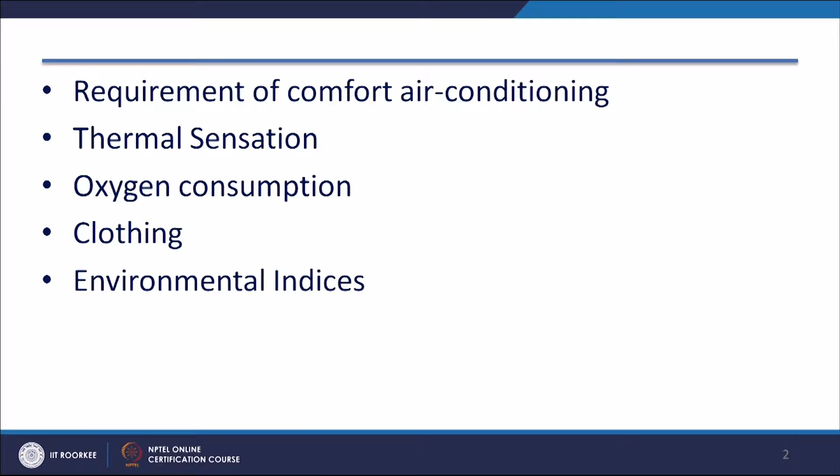Thermal comfort is required, as I've told you in previous lectures, to increase the working efficiency of an individual. If the efficiency of an individual is maintained, then the production in industries will increase. Even in offices, efficiency will increase if the offices are air conditioned.

The outside environment never keeps you in a state of thermal comfort. Either you have winter season or summer season, or sometimes temperature is low and humidity is very high in the rainy season. So if somebody wants to remain in thermal comfort, an artificially controlled environment has to be created.

In this environment, ideally the temperature has to be 25 degrees centigrade and relative humidity of the order of 50%. But outside in the world, it does not happen.

So you have some thermal sensations. You may feel hot, you may feel warm in the outside environment, you may feel cold, and you may feel chill. But as an engineer, we have to quantify these things.

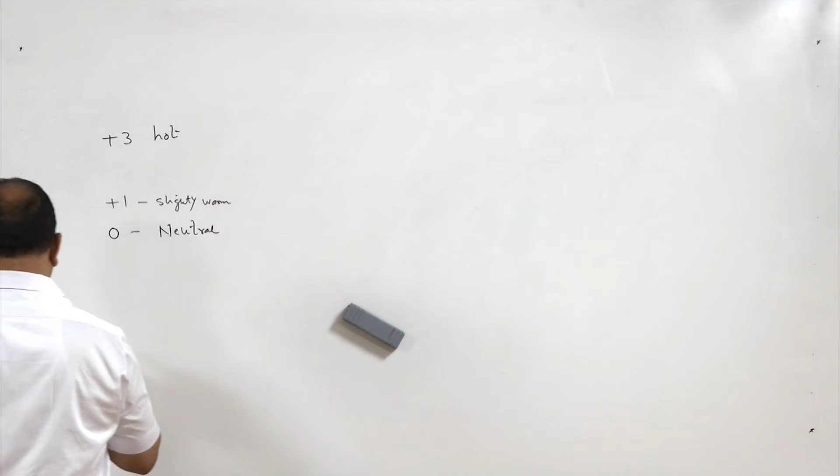Then +1 is slightly warm. +2 is warm.

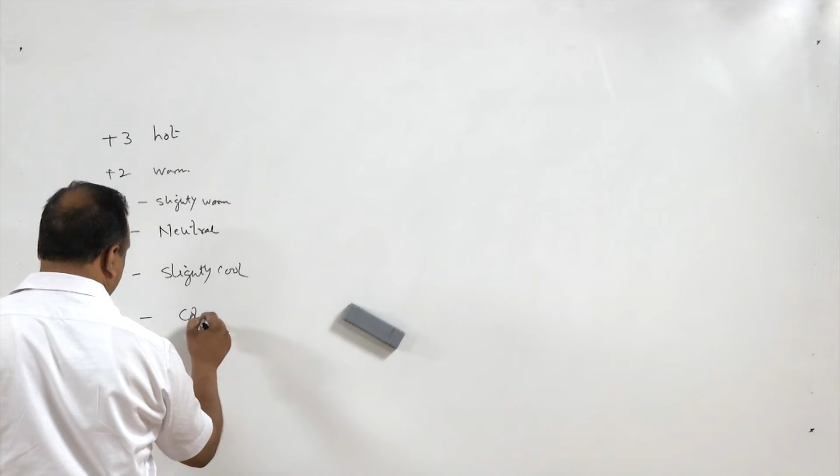Similarly, -1 is slightly cool. Then -2 is definitely cold, and -3 is severely cold or chill.

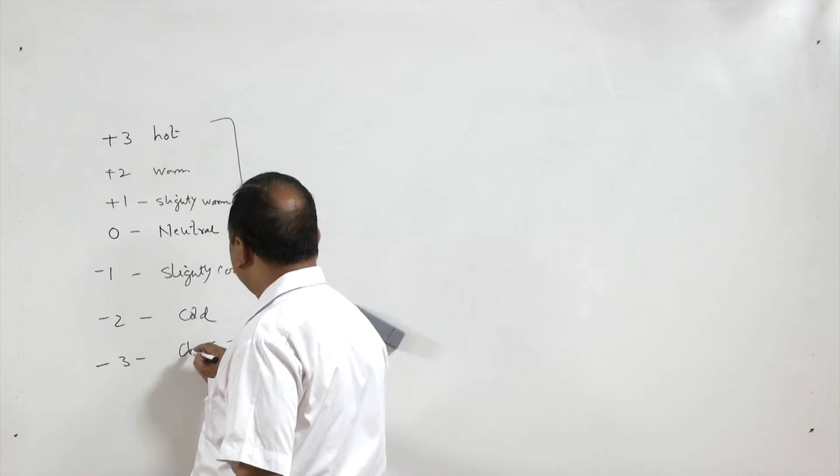So these are the thermal indices. ASHRAE has given equations for male, for female, and a generalized equation, and there are a number of equations.

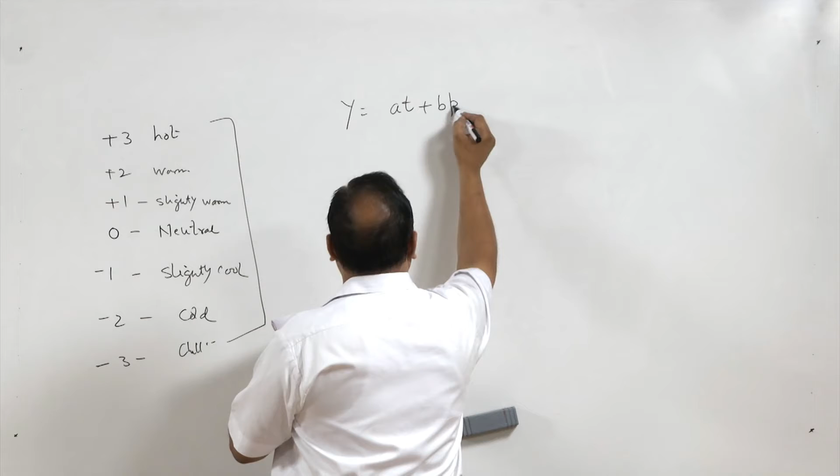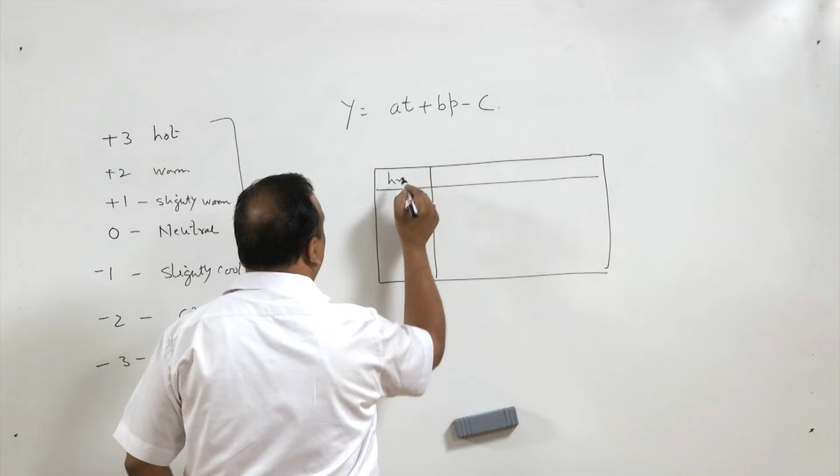But if you refer to Stoecker's book, you will find that he has given one generalized equation: y is equal to A*T plus B*P minus C. For A and B, a table is given based on number of hours of exposure, and for A, B, C, a table is given.

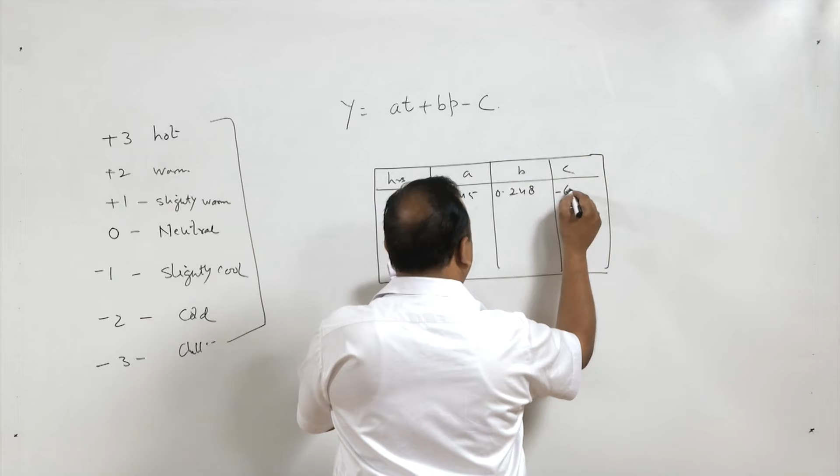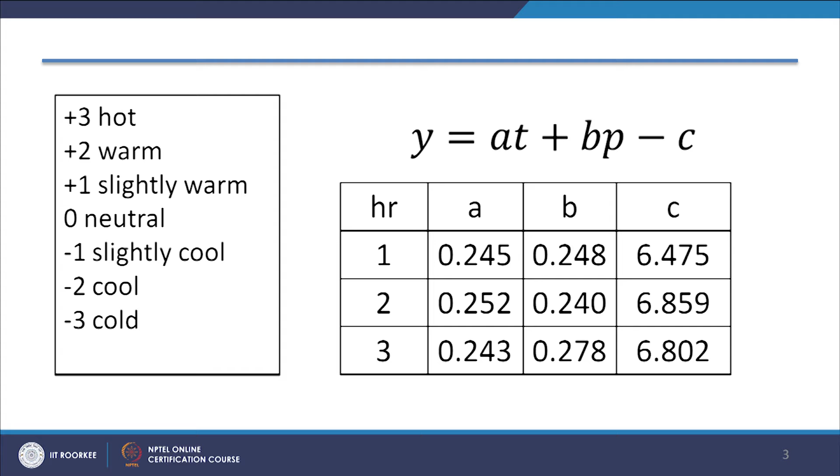Suppose exposure is for 1 hour, the values are 0.245, 0.248, minus 6.475. If exposure is for 2 hours, for a particular environment it is 0.252, 0.240, minus 6.859. If exposure is for 3 hours, then 0.243, 0.278, and minus 6.802. So Stoecker has simplified this.

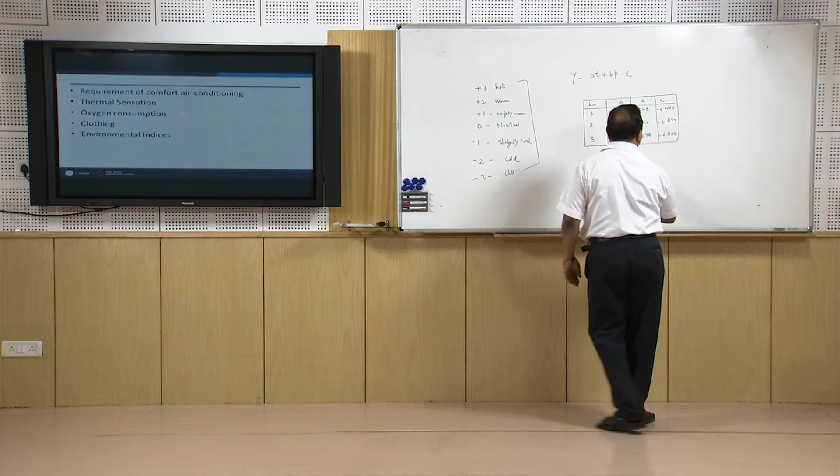Now suppose somebody is exposed to an atmosphere. We can take the conditions: suppose an individual is exposed to the atmosphere at let us say 30 degrees centigrade. If somebody is exposed to 30 degrees centigrade, the feeling of warmness or coldness will also depend upon the relative humidity. Temperature is not the only governing factor.

Since it is going to be related with the relative humidity, the saturation pressure of water vapor at that particular temperature is also taken into account here. So P is the saturation pressure of water vapor at this saturation temperature. We will take the value of saturation temperature from this table.

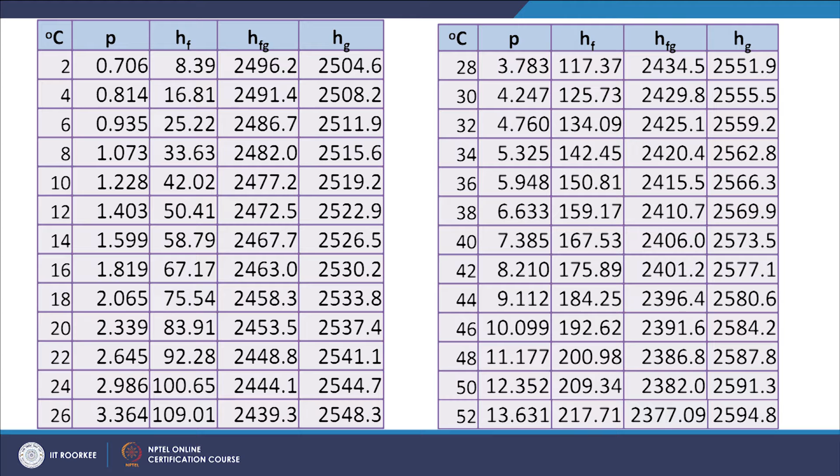So if the temperature is 30 degrees centigrade, T is equal to 30 degrees centigrade, and the partial pressure of water vapor at 30 degrees centigrade is 4.247. So partial pressure of water we have also taken into account.

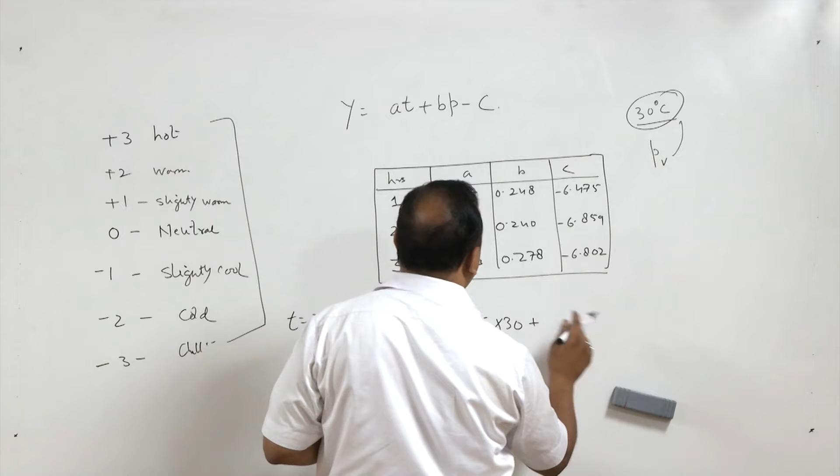With this, if I take 1 hour working, y is equal to 0.245 multiplied by 30 plus 0.248 multiplied by 4.247 minus, so it is minus C, it will be minus 6.475. So y is going to be...

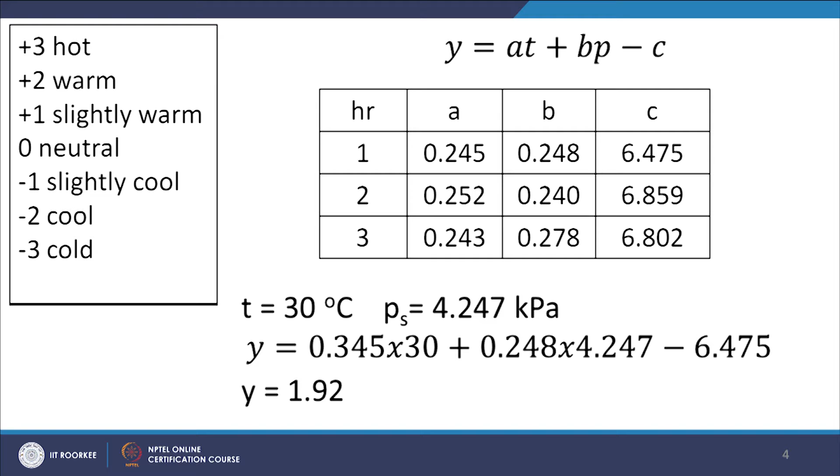0.245 multiplied by 30 plus 0.248 multiplied by 4.247 minus 6.475 equals 1.92. So y is equal to 1.92. That means at 30 degrees centigrade, you will feel slightly warm.

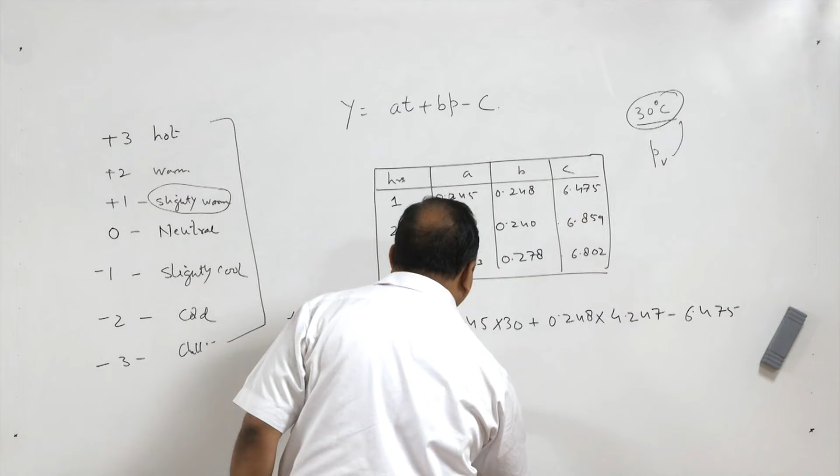We can cross verify this. Now let us go for 3 hours. This we have done for 1 hour. Now if we do for 3 hours, then it is going to be 0.243 multiplied by 30 plus 0.278 multiplied by 4.247 minus 6.802.

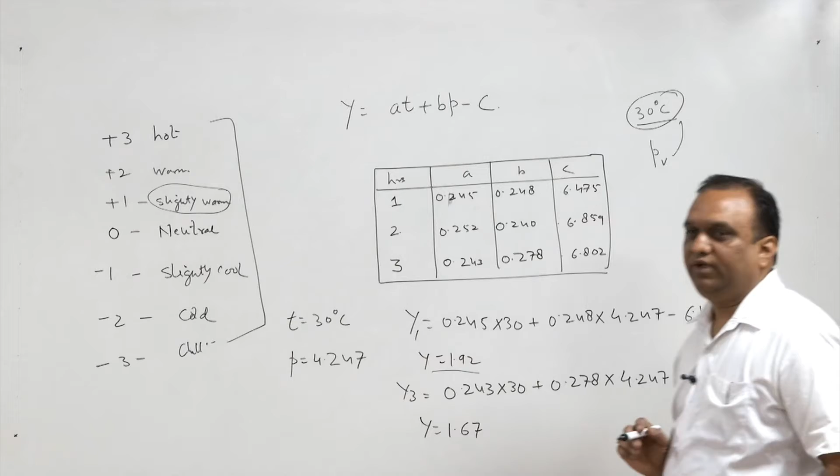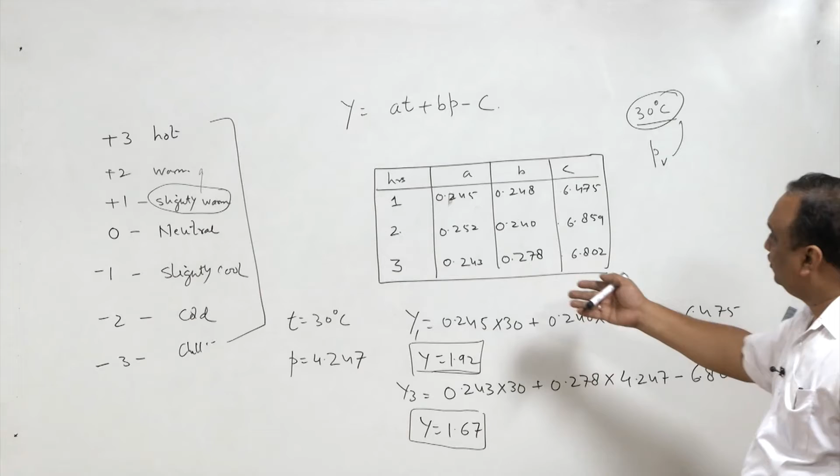Now we can make a very interesting conclusion here. Y is equal to 1.92 and y is equal to 1.67. So 1.92 is more towards warmer, it is warm in fact, and 1.6, so the sensation of heat is less in this case, here in this case it is more. And it is obvious, if somebody is exposed to this atmosphere for 3 hours, definitely the body will try to acclimatize. This is the tendency of the body. So the body's internal mechanism of cooling will get accelerated, and the feeling of high temperature will be reduced if he or she is exposed for 3 hours.

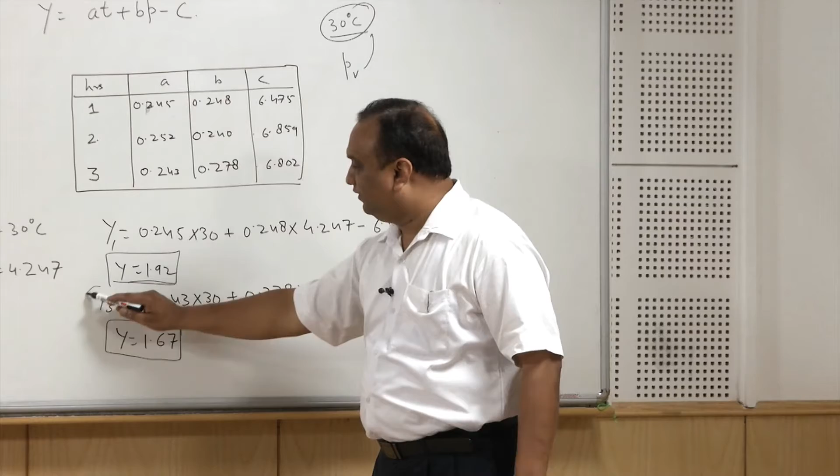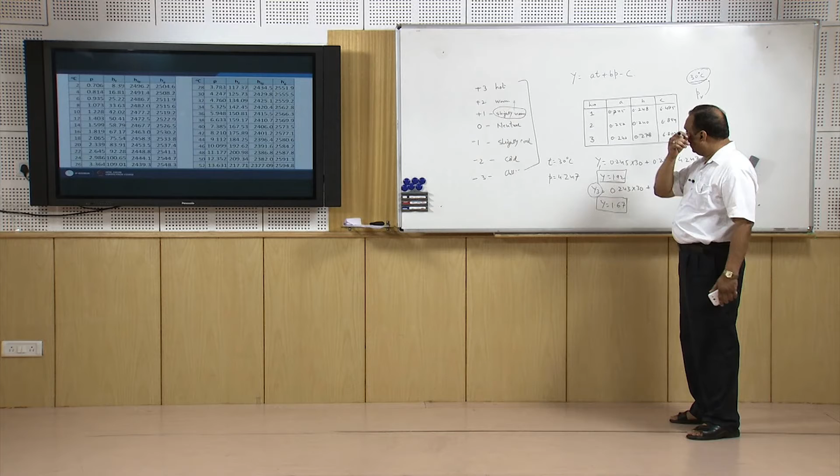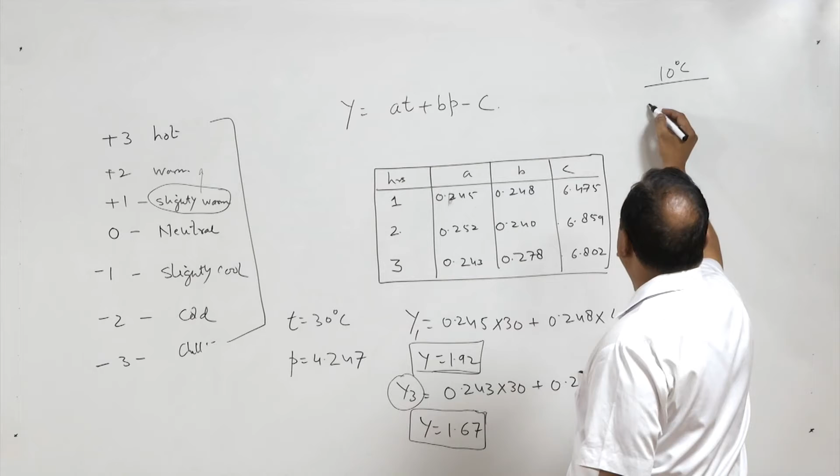Similarly, we can do calculations for lower temperature. You can do it yourself. Temperatures at, let us say, 20 degrees centigrade or 18 degrees centigrade outside temperature. Let us see if outside temperature is 10 degrees centigrade. If outside temperature is 10 degrees centigrade, then partial pressure of vapor is 1.228.

And with the help of these values: 0.245 into 10, plus 0.248 into 1.228, minus 6.475. We are getting minus 3.7.

So outside temperature is 10 degrees centigrade, we will get almost a chilling effect, right? And if you look at chilled water, it is approximately in the range of 4 to 7 or 7 to 8 degrees centigrade. So at 10 degrees centigrade outside temperature, you will get almost a chilling effect.

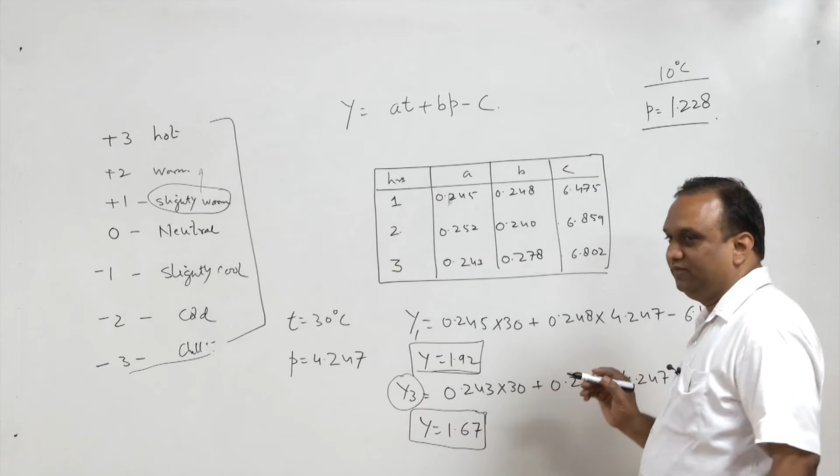Now let us talk about 33 degrees centigrade. We can cross verify this also. Our skin temperature is approximately 33 degrees centigrade. Body temperature is 37 degrees centigrade, but our skin temperature is approximately plus minus 1 degree centigrade depending upon the outside temperature.

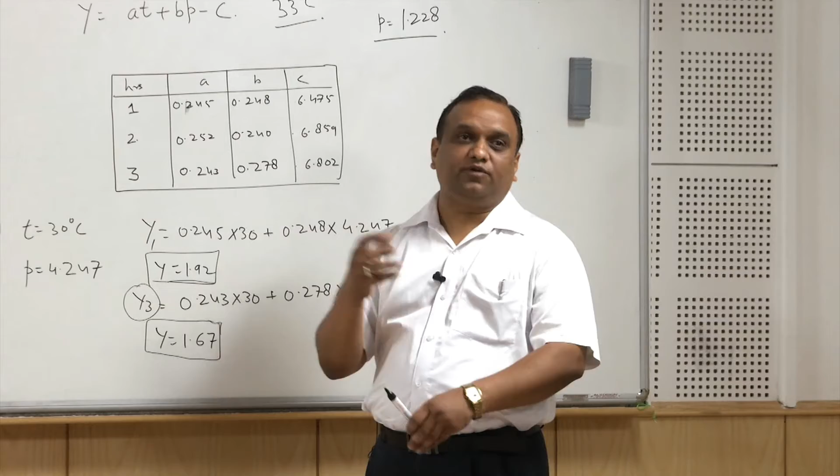If outside temperature is high, then skin temperature will also increase to reduce the heat flow to the skin. If outside temperature is low, the skin temperature will go down, and evaporation from the skin increases and lowers down the temperature of the skin. Anyway, so it is considered 33 degrees centigrade plus minus 1 degree centigrade, so it can be 32 or 34 degrees centigrade.

Now, if outside temperature is, let us say, we have to find outside temperature. Body temperature, skin temperature is 33. Suppose we are sitting in an outside environment, doing or not doing any activity, the heat liberated from the body will be 100 watts.

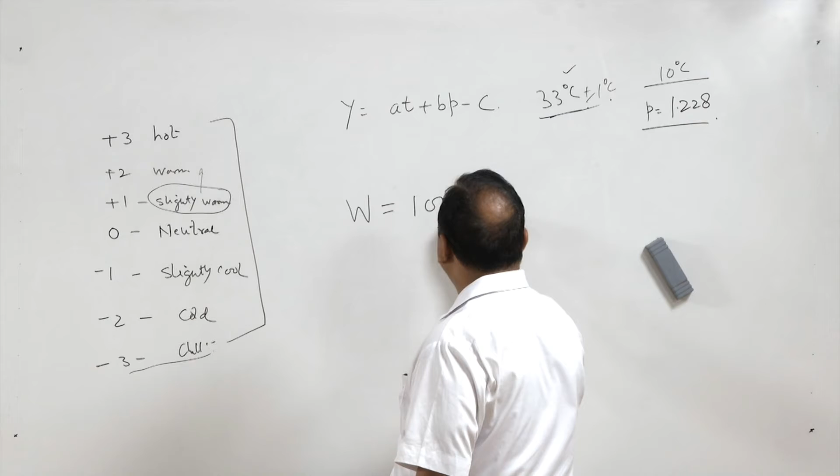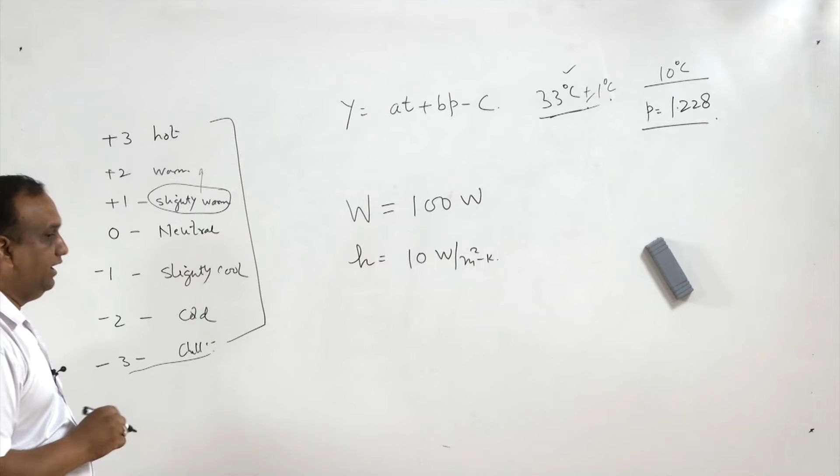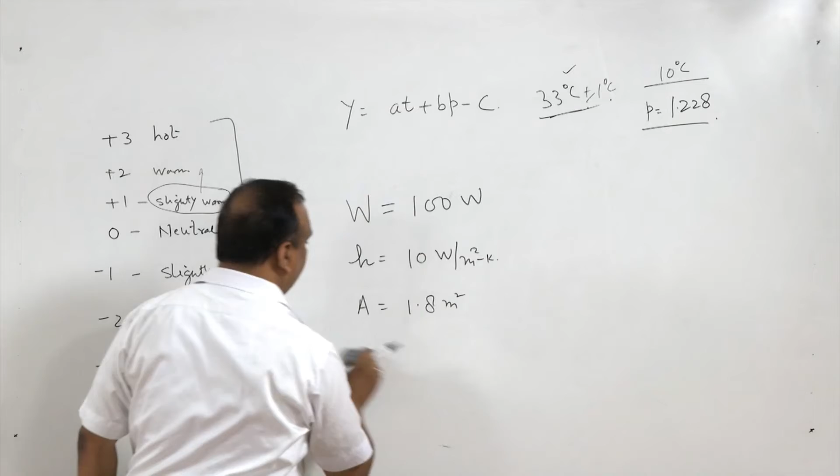There is a breeze, in that case H can be taken as 10 watts per meter square Kelvin. Area we have calculated in the previous lecture, maybe you can take 1.7 or let us take 1.8 meter square. With this, suppose all the heat is dissipated by convection heat transfer, so 100 is equal to Q is equal to H A delta T.

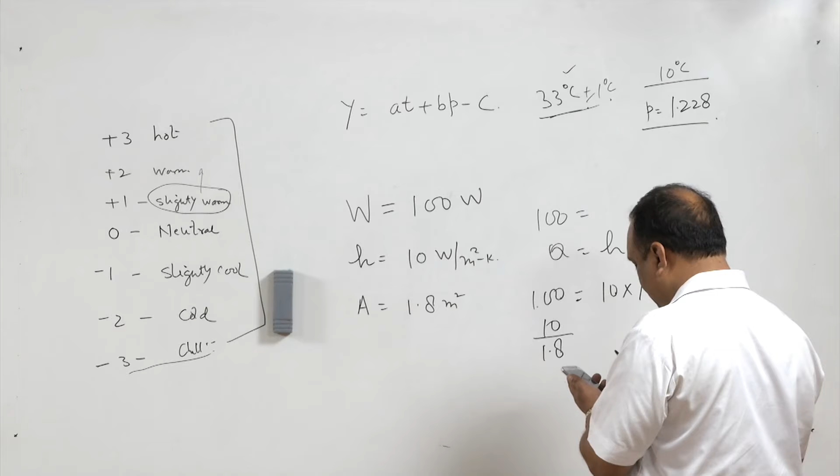So H is 10, for the sake of convenience I have taken these simplified values. 1.8 into delta T is going to be 100, right? And if this 100 is divided, this is 10 divided by 1.8, and that is going to be approximately 10 divided by 1.8, which is 5.5 approximately. These are all approximate values.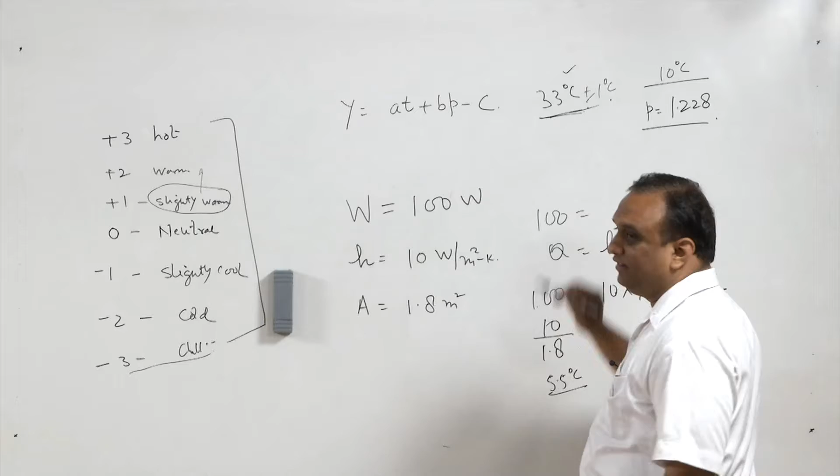So delta T is 5.5. It means if body temperature is 33 degrees centigrade, outside temperature has to be 5.5 degrees centigrade less than this. It has to be 27.5 degrees centigrade. If outside temperature is 27.5 degrees centigrade, all 100 watts of heat will be liberated.

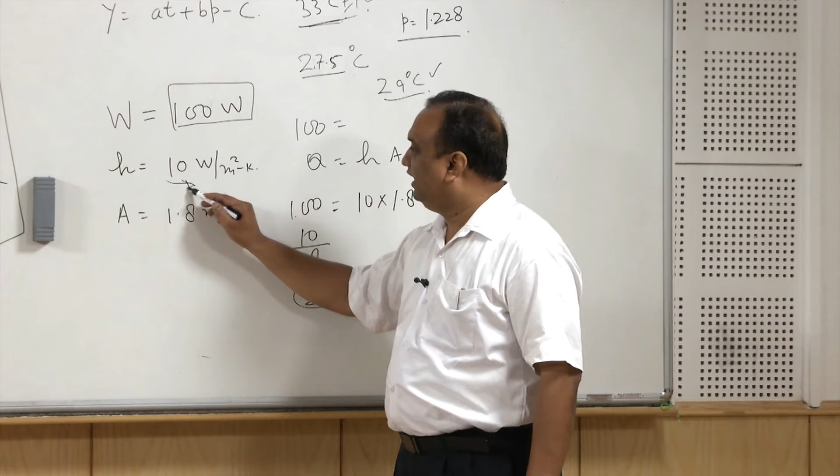But as we know, part of this heat is also taken away by evaporation from the skin. That is why you must have realized that when outside temperature is 29 degrees centigrade in the month of February or March or September, you start feeling slightly uncomfortable because convective heat transfer is not sufficient. So either you increase the H by blowing air over the body, that is one way of enhancing heat transfer. That is why when you are sitting under the fan, this H increases, and this increase will reduce the delta T.

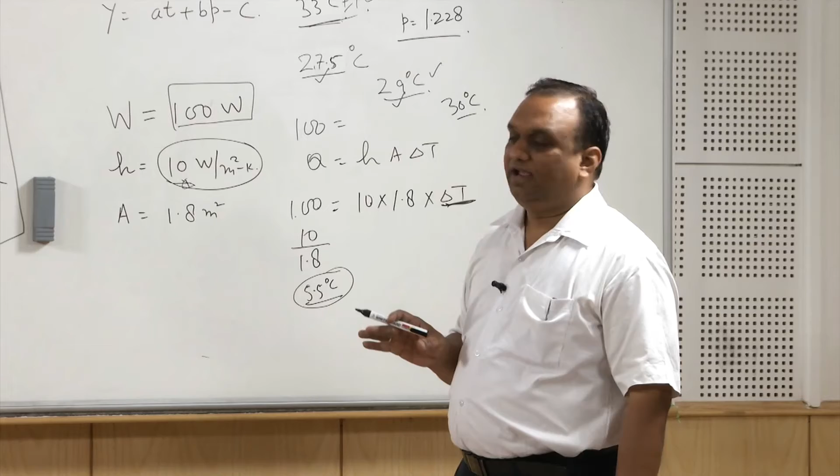It means instead of feeling comfortable at 27.5, you may start feeling comfortable at 29 degrees centigrade, or for that matter 30 degrees centigrade. That is why when the weather is extremely hot and you are coming from outside and sitting before the fan, you feel an extreme state of comfort. The reason being the value of H increases in that case.

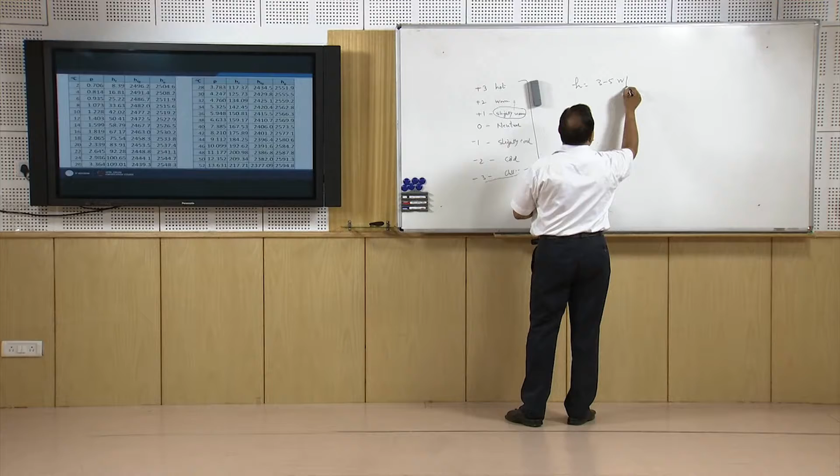Now, value of H for air when it is less than 0.2 meter per second, in that case the value of H is 3 to 5 watt per meter square Kelvin. But otherwise, if the velocity is more, there is a correlation 8.3 V raised to power 0.6.

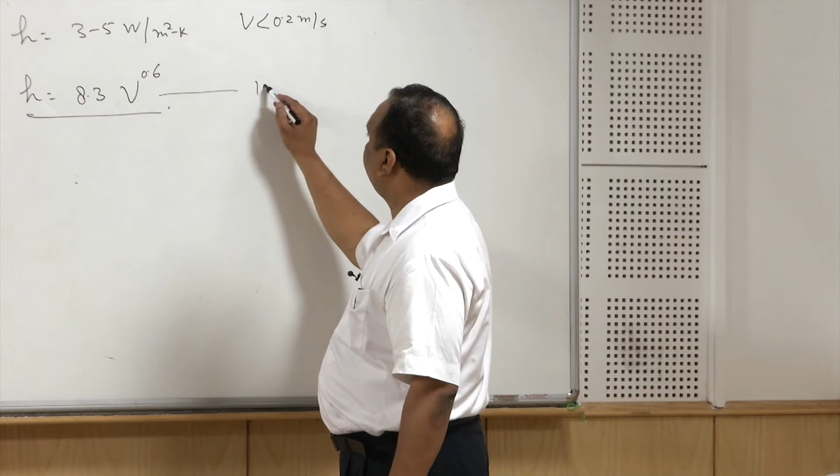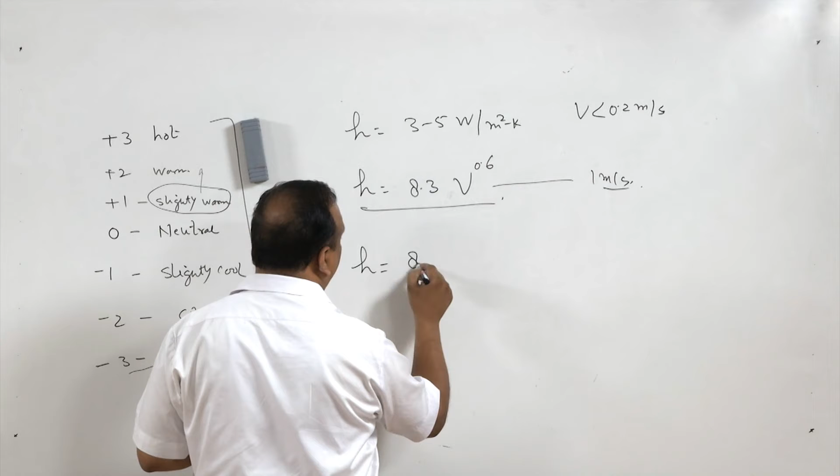Using this correlation you can find the value, suppose velocity is 1 meter per second. In that case you can find the value of H as 8.3 watts per meter square Kelvin. If you are walking, not sitting, suppose you yourself are walking, this relation is slightly modified, it becomes 8.6, or this curve tends to be flatter, 0.53.

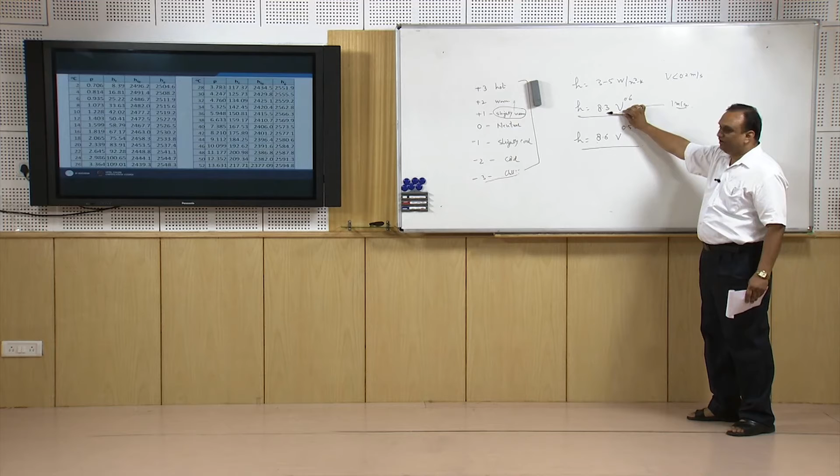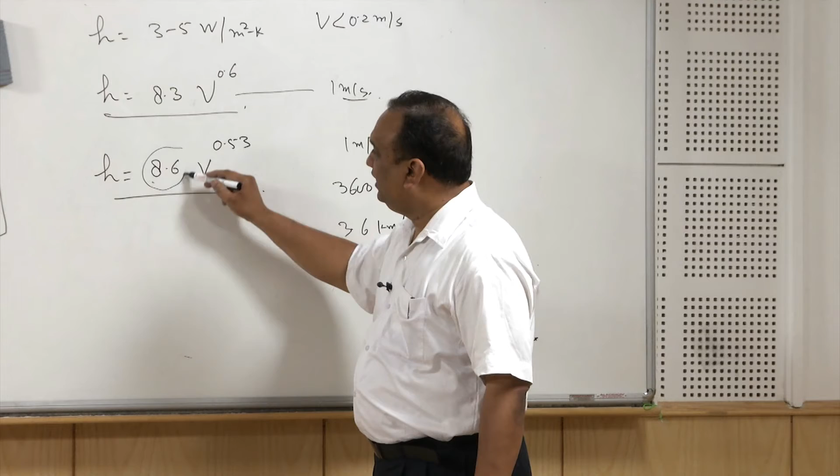So if the air is blown over you with 1 meter per second, H is 8.3. If you are walking 1 meter per second, that is not very fast walking, 1 meter per second is 3600 meter per hour, it is 3.6 kilometer per hour. This is normal walking speed, not very high. So if you are walking 1 meter per second, the value of H is going to be 8.6. So instead of air blown over you, if you walk with this same speed, the value of H is higher, right?

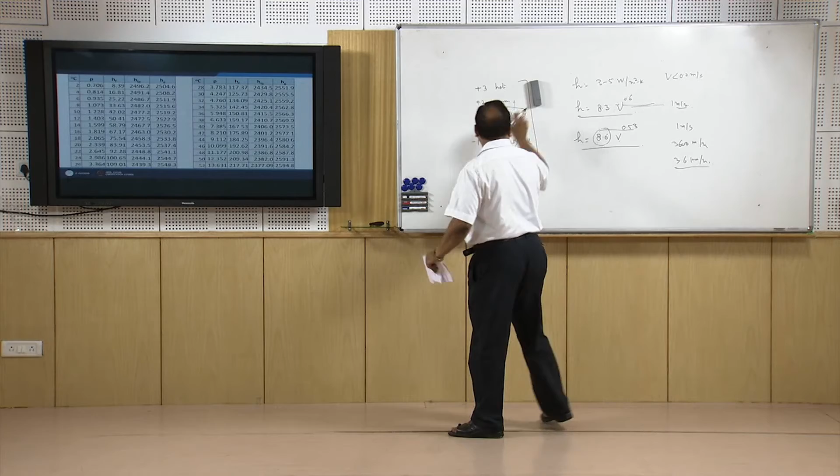Now in air conditioning environment, suppose I am sitting wearing only a half sleeve shirt, another person is sitting with a suit. So the person wearing a suit definitely demands lower temperature. He will say that I am feeling comfortable at 22 degrees centigrade. I am wearing a half sleeve shirt, I will say I am feeling comfortable at 25 or 26 degrees centigrade.

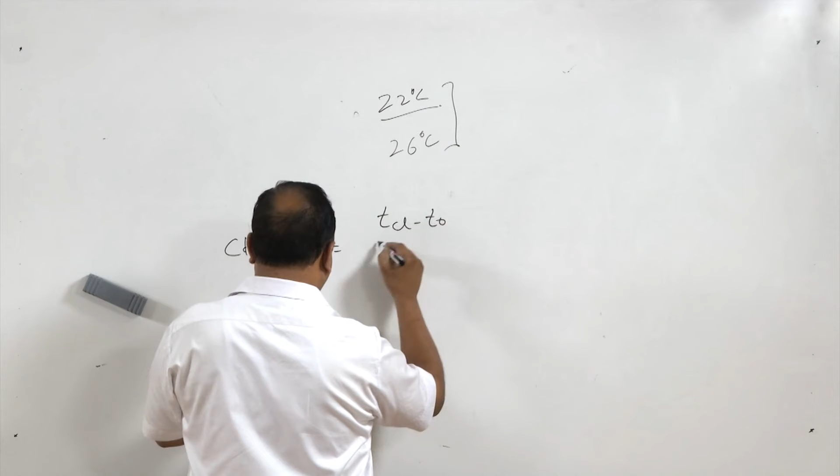So this clothing also, because these clothes act as an insulation, clothing thermal efficiency is TCL minus TO divided by TSK minus TO. It means temperature of cloth, outside temperature, divided by skin temperature minus outside temperature. That is clothing efficiency, right? If the cloth temperature equals outside temperature, then efficiency is 0.

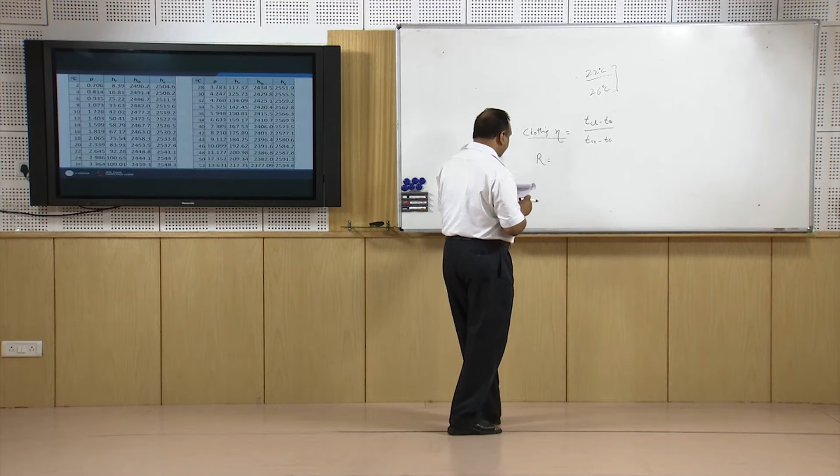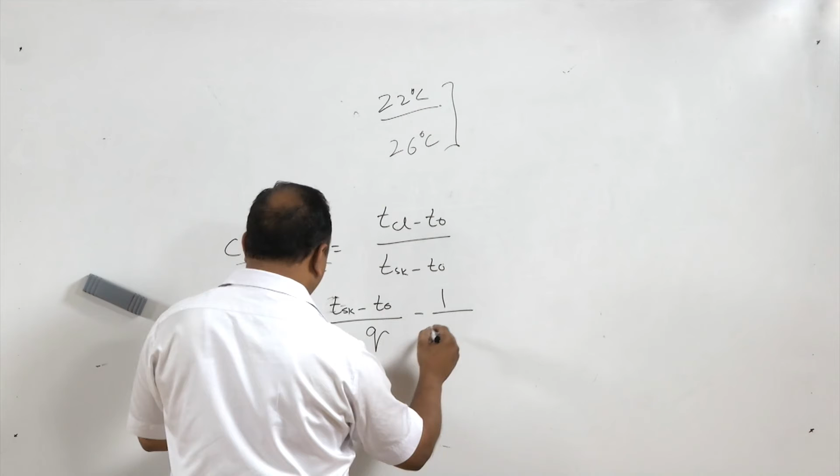Now the cloth also offers a thermal resistance R, and this thermal resistance is equivalent to skin temperature minus outside temperature divided by heat flux, minus 1 by H film CL. It is nothing but a simple equation of conduction and convection heat transfer, through that equation it has been derived. This is the resistance offered by skin and outside, this is film coefficient, film resistance, because when convective heat transfer occurs over the cloth, a film will be formed over the cloth. So the difference of these two resistances will give the clothing resistance, right?

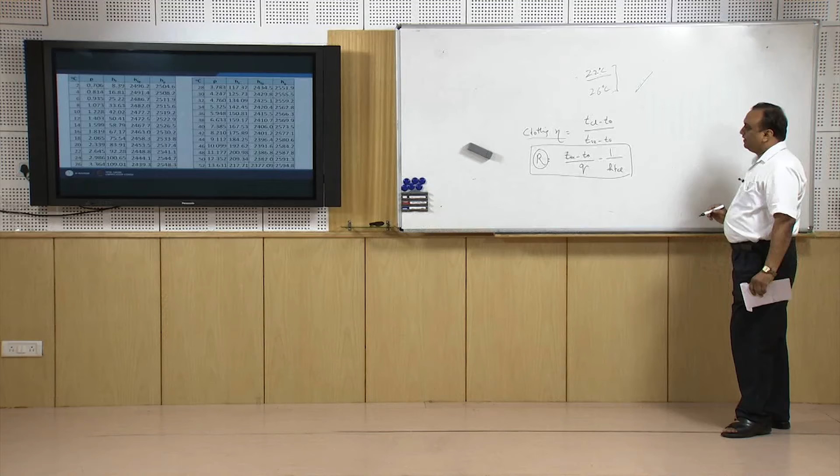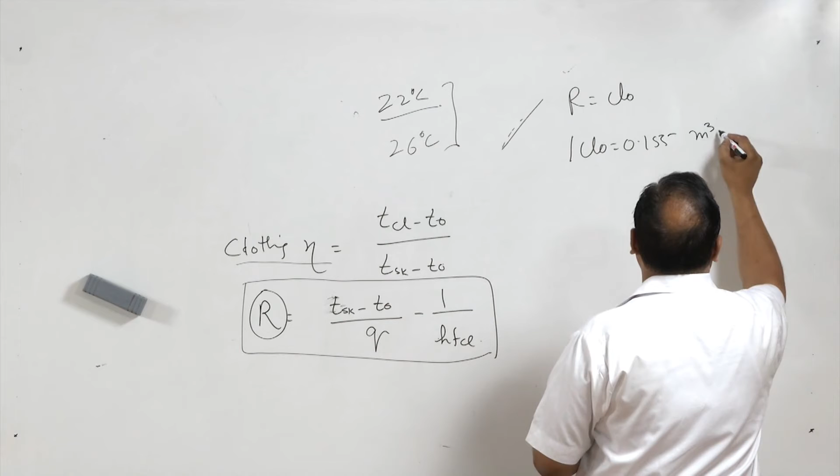Now this clothing resistance is expressed in terms of CLO, and 1 CLO is equal to 0.155 meter square Kelvin per watt.

Now I will show you one diagram related with comfort with clothing. These are ASHRAE summer and winter comfort zones, but since inside environment is the same, it has to be the same. ASHRAE assumes inside temperature 24 degrees centigrade. But if you look at the summer comfort zone, this is 0.5 CLO, equivalent to summer clothing, like my clothing, which is approximately 0.5 CLO. Now if you go to winter clothing, wearing a suit or a coat, it is going to be approximately 1.0 CLO.

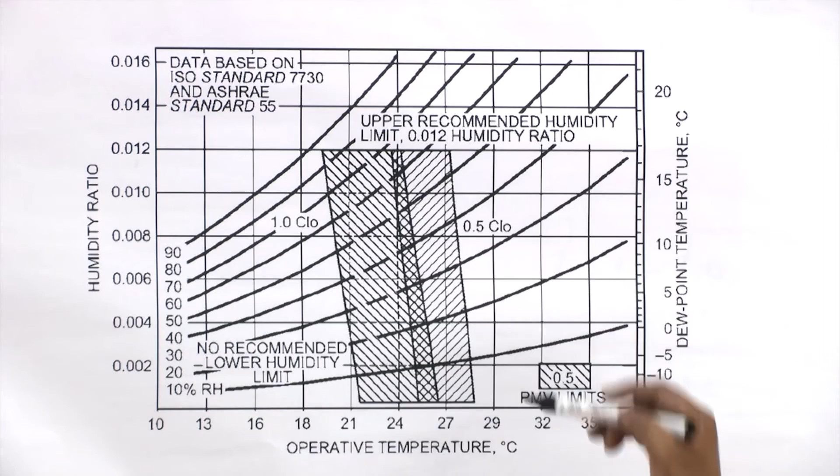And the data are based on the ASHRAE standard 55, with air speed less than 0.2 meter per second. You can see, but they are not very distinctive boundaries. Operative temperature, acceptable level of operative temperature, for winters, if you are heavily clothed, it is starting from 21 or 21.6 or 21.7, and when the humidity ratio is increasing, the operating temperature is also decreasing.

And when it comes to this, because this is the upper limit of specific humidity, that is 12 grams per kg of dry air, it turns out to be around 18.5 degrees centigrade, approximately 18.5, 18 and 21.3. So approximately 19 degrees, 19.5 degrees centigrade.

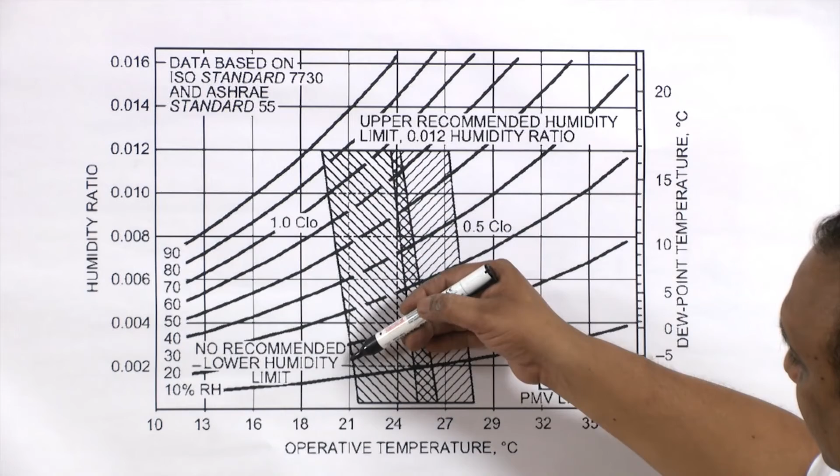When the specific humidity or humidity ratio is reducing, this temperature is also rising, and when the humidity is very low, then it is approximately 21.5 or 21.6. From here we can infer that for higher humidity we can go for the lower temperature.

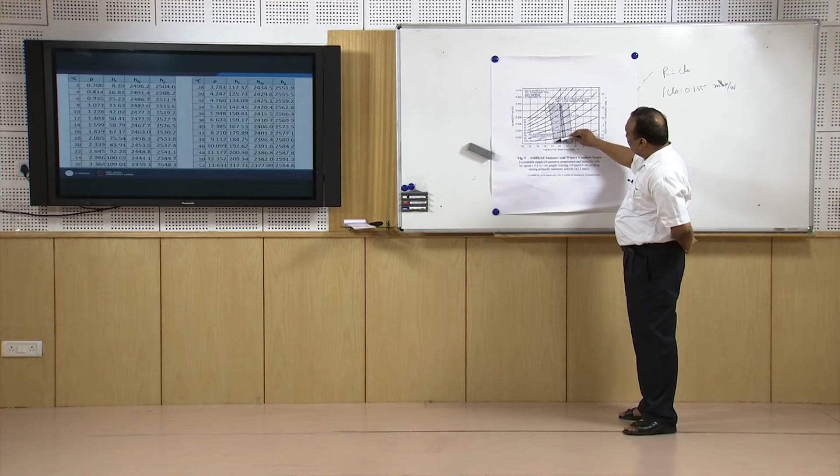So if the outside temperature is low, if humidity is high, the feeling of cold sensation will be less.

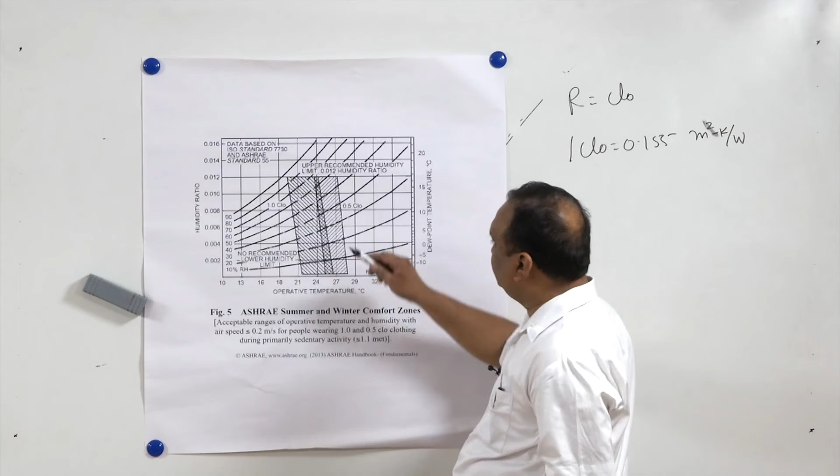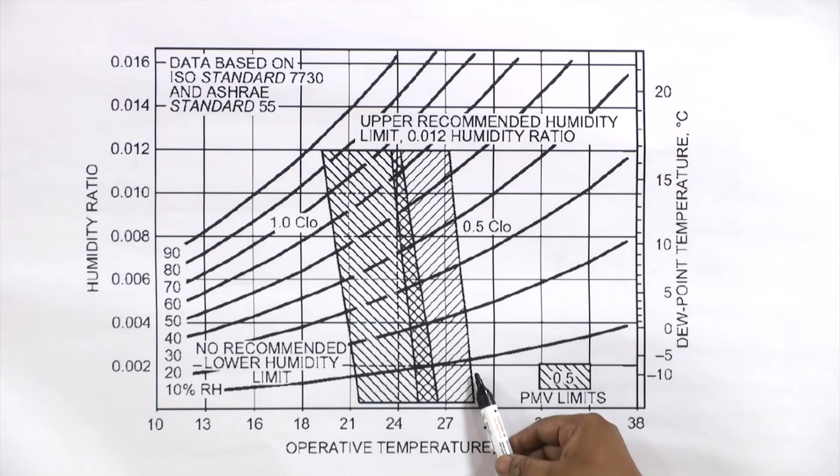Now when this is summer clothing, if the relative humidity is low, we can go up to 28.5 degrees centigrade, and the moment the humidity starts increasing, the temperature keeps on reducing, and this is the upper limit. It comes to 27 degrees centigrade. Beyond that, this is not a comfort zone, this is the comfort zone.

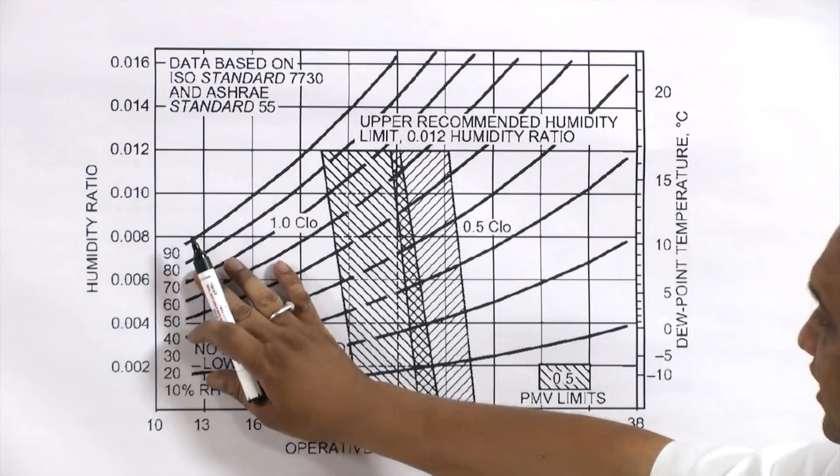This shaded area is the comfort zone for summer and winter as well. But under any circumstances, the specific humidity is not allowed to be more than 12 grams per kg of dry air. So this is a restricted area, this is a restricted area. Here you are not supposed to design the system, and the comfort is confined to only this area, and this is the operative temperature of the surroundings.

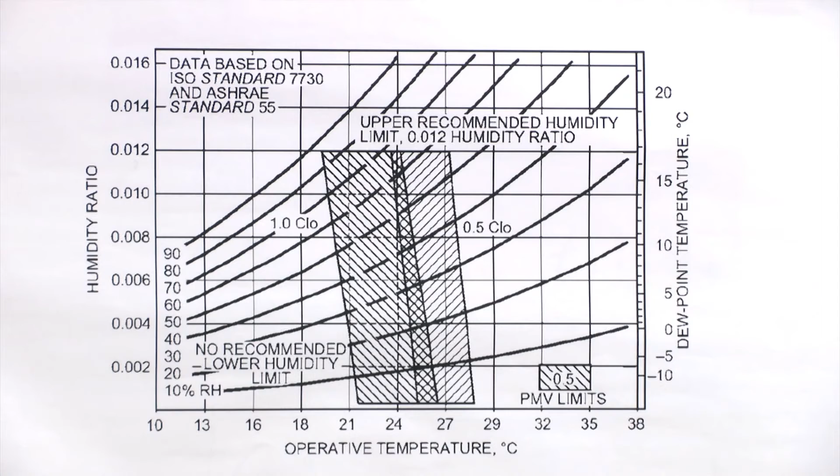So this is for sedentary activities, where somebody is sitting, writing or typing, when the metabolic rate is less than 1.1 met. If metabolic rate is high, definitely these ranges will also change.

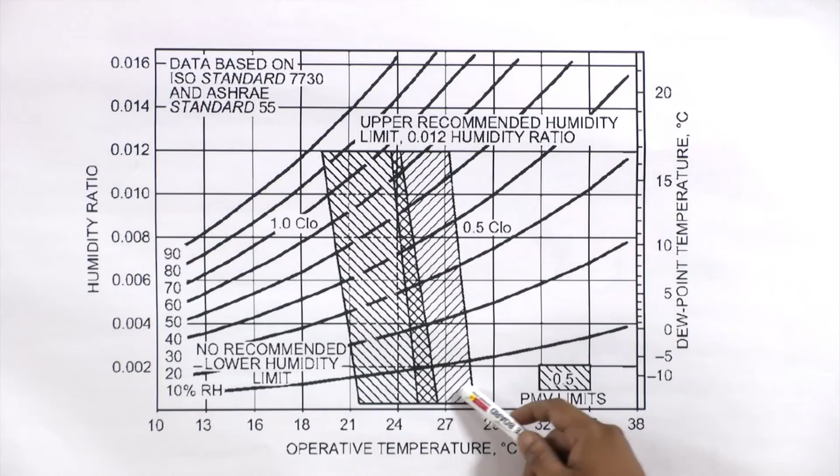And you can find there is overlapping also. These lines are not very rigid lines. They also depend upon the person, which geographic region he or she is living in, or which race they belong to. It depends on many factors. But they are statistical data, and they are widely agreed data for internal comfort, or for the comfort of occupied space.

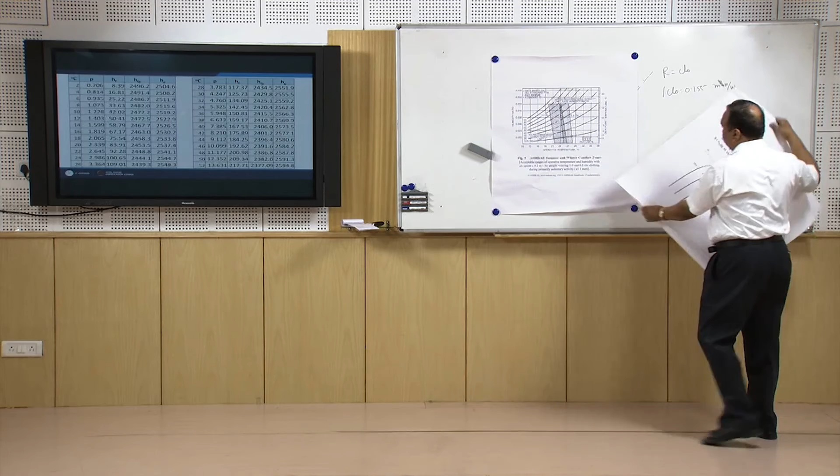Now similarly, we have another graph for air velocities and operative temperature. In this graph, on the y-axis, air velocity is taken, and on the x-axis, the operative temperature is taken.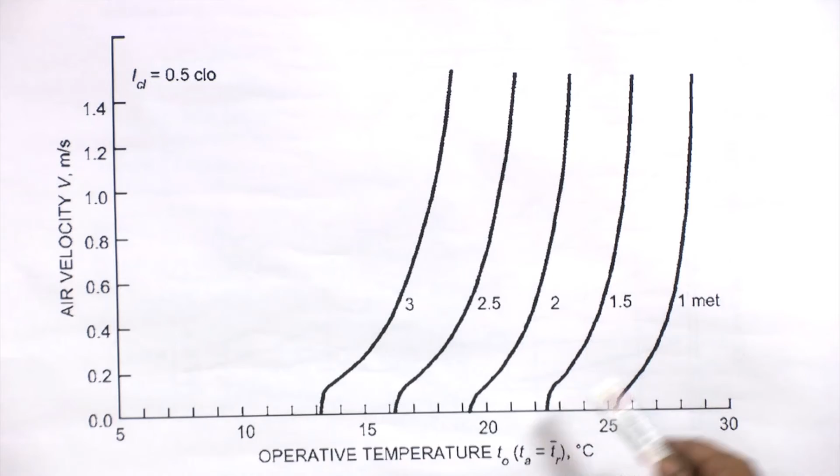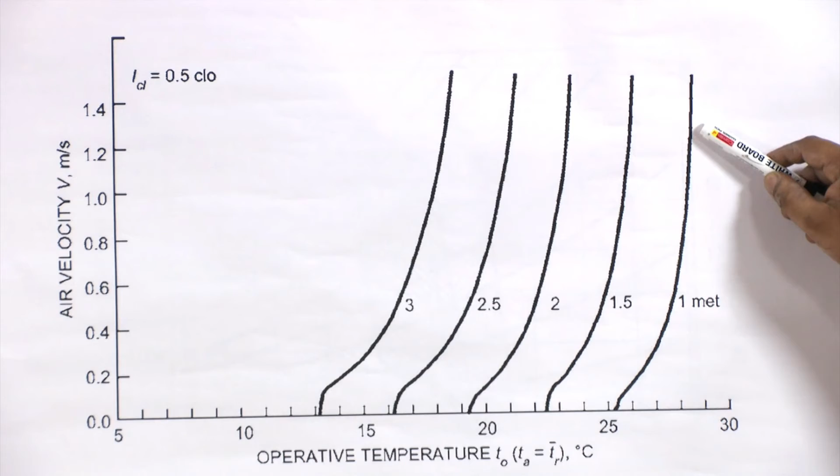Now for activities, suppose 1 met activity is there, the operative temperature where air velocity is not 0, we take approximately 0.2. So operative temperature is approximately 26 or 27 degrees centigrade, 26 point something. But the moment velocity increases, we can go for higher operative temperature. This phenomenon I have already explained to you: if air is blowing with a higher velocity, operative temperature will increase.

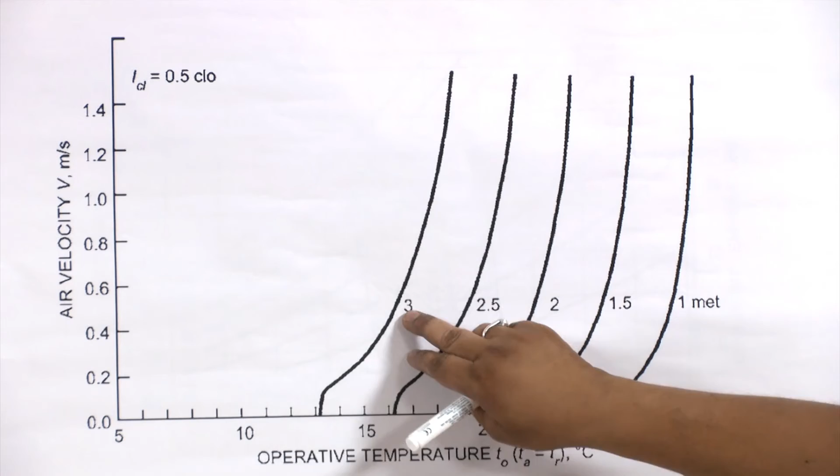So in this direction, metabolic activities are increasing. Suppose this is 3 met, you can find if the air velocity is 0.2 meters per second, this is for clothing level of 0.5, it is for summer clothing. So the temperature is going to be 13 or 14 degrees centigrade.

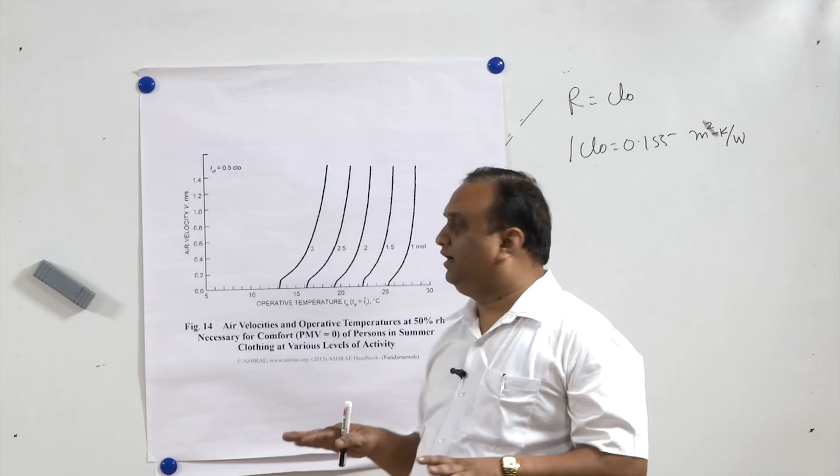And this is operative temperature at 50% relative humidity necessary for comfort. Predictive PMV is predicted mean vote. This 0, 1, 2, 3 classification I told you, from chill to hot climate. So predictive mean vote means a person in this particular environment: 0 means a person is feeling extremely comfortable.

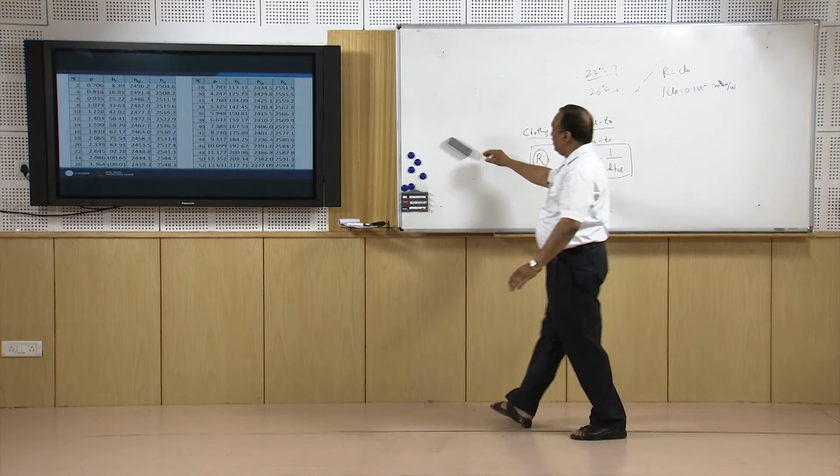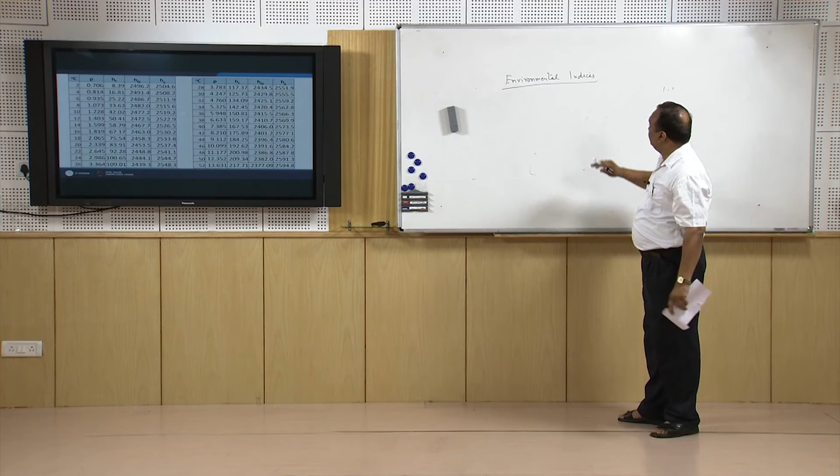After this, we will start with the last topic to be covered here: environmental indices. Environmental indices is a combination of 2 or more parameters into a single parameter. So you just look at this index, a particular index, and you come to know about the environment.

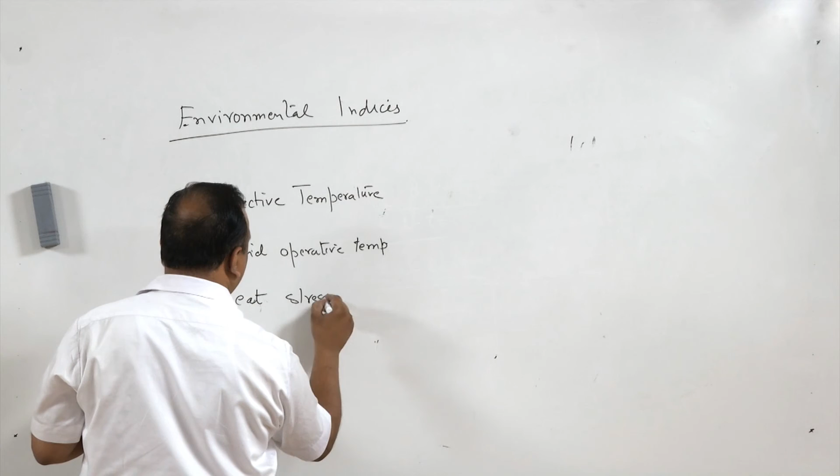First is effective temperature. Another one is humid operative temperature. And the third one is heat stress index. Effective temperature I have already explained to you previously. Humid operative temperature is the temperature of air which is 100% humidified, or relative humidity is 100%, and the same amount of heat is dissipated to the surroundings. So that is known as humid operative temperature.

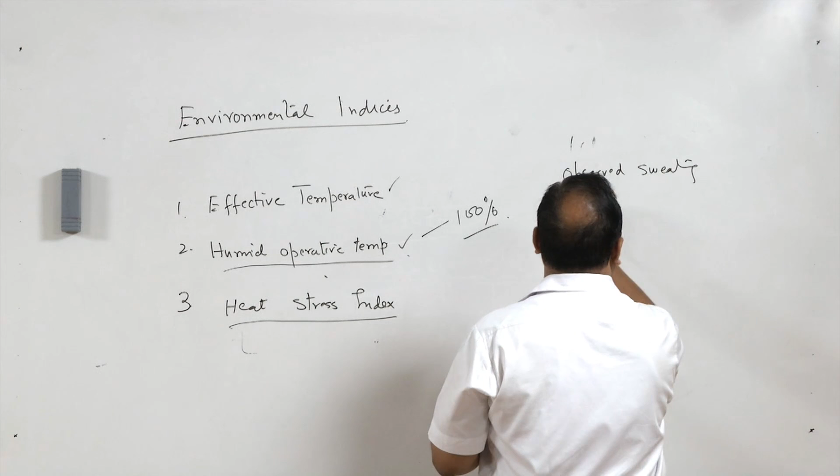Now the third one is heat stress index. That is the ratio of observed sweating from the skin to the maximum possible sweating from the skin, and this ratio is known as the heat stress index. If we have the value of these indices, we can have a fairly good idea about the state of thermal comfort in a confined environment.